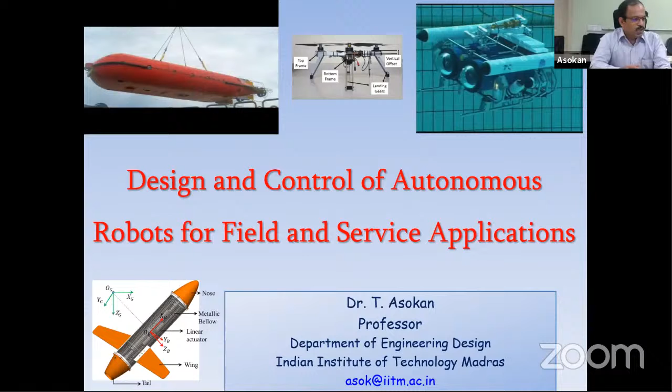Before getting into the topic, let me briefly tell you what I do as part of my teaching and research. As introduced, I am in the Department of Engineering Design, so my primary interest is in robotics. Of course, I work in other areas like medical devices and other design projects also, but primarily I look at the problem from three perspectives. One is the design of robotic systems - how can we design innovative robots or innovative robotic systems for field or service applications?

Once you design a robotic system with some novelty, we need to look at the dynamics of the system to ensure that the robot will perform the way you want. And to do that, we need to develop the mathematical models, simulate it, and then try to see how the open loop performance of the system is. Then we need to go for the design of controllers or the control system to ensure that the system behaves the way we want. So this is basically the three areas I focus on.

Most of the robotics projects which I do primarily focus on these three aspects. So any robotic application which has got these three components will be of interest to me.

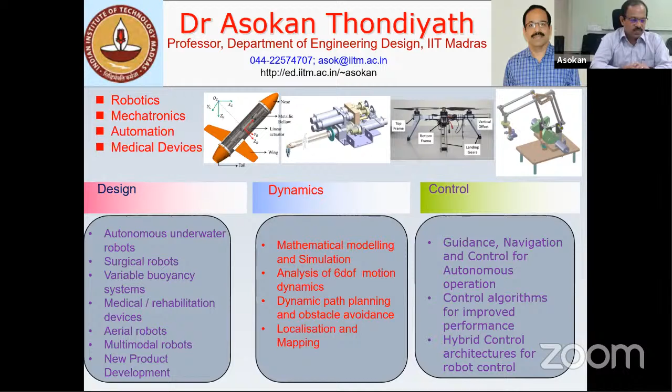I've been working on various projects for the last 20 years. I started my research with underwater robotics and now currently focusing on medical robotics, or how do we develop robotic systems for medical applications. But today's talk will be primarily on autonomous robots, or what are the difficulties in developing autonomous robots. We talk a lot about autonomy, and people are talking about autonomous robots, humanoids, and self-driverless cars for many years.

And we see that still we are far away from having a fully autonomous robot. A person who is not fully into robotics will think, what is the challenge, why are people not able to come up with autonomous robots? Because you see many things in movies, and many times we believe that these things are really possible, and we used to wonder why it is not coming into the market.

There are many challenges in developing autonomous robots. I'll just touch upon a few of such issues, and then briefly explain a project which we did on development of autonomous underwater robots. That's going to be the agenda. I have only some 35 minutes left, so I'll try to finish within the time.

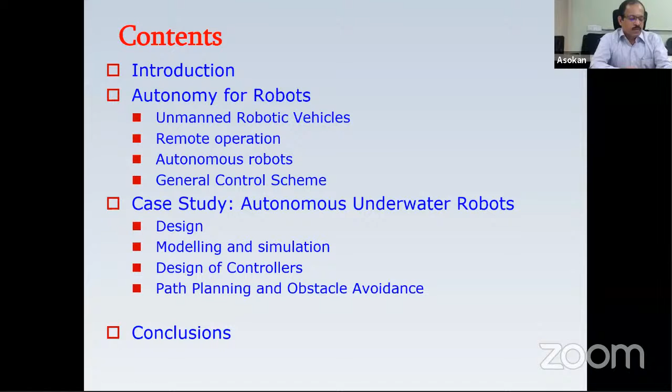I'll be talking, starting with autonomy for robots, basically talking about the different types of robots and where we actually use these kinds of robots.

If you look at the history of robots or the evolution of robots, you will see that we had industrial robots somewhere in the 1960s, and till 2000 we were having only industrial robots, and most of the other robots were still in the laboratories. It was only in the 2000s everyone realized that we have developed too much technology, or too many systems and technologies available, which need to come out of the industry and shop floor and move to the home or to the places where actually humans will be interacting with the robots, where the robots can be of much use to the human.

That is where we started getting underwater robots, medical robots, and personal robots - you name any field, and we can see that there are some applications of robotic technology in that field.

That is one of the important aspects of robotic research also, because the current research and development in robotics is primarily propelled by the application field. So if you have an application, if you can develop a robot for that application, that is basically the contribution that you can make. Parallelly, we'll be developing control systems, navigation systems, and other things.

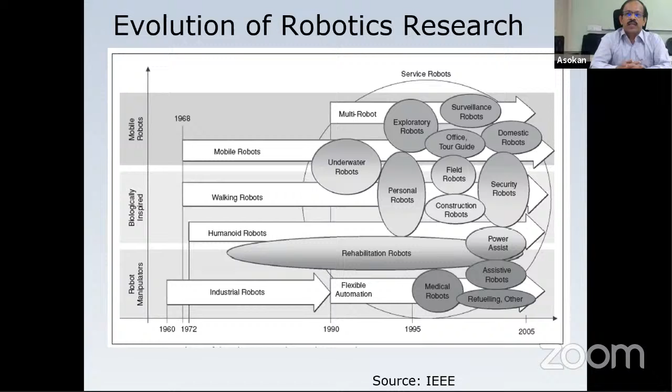But primarily, when it actually goes to the field or comes to an application, that is where we are making a real contribution. Now coming to these, these are actually some of the robots which we call field and service robots.

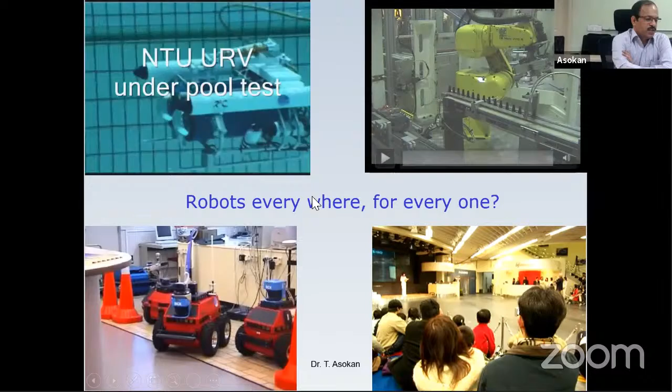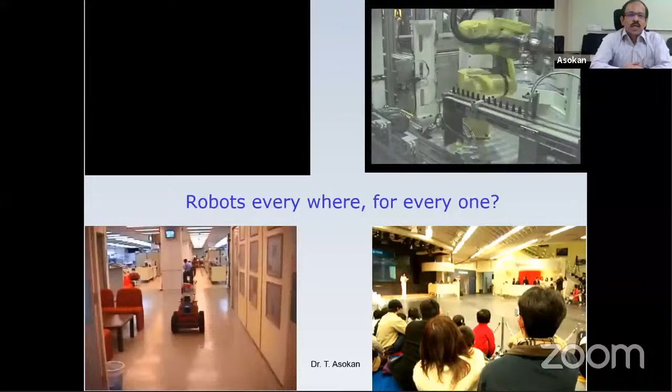So what you are seeing is an underwater robot on the top, and then you can see the mobile robots, and of course this is an industrial robot which is familiar to many of you, which has got a fixed base, and all other robots you are seeing have mobility.

So the requirement in an industrial robot is completely different from a field or service robot, because you add many things to the robot and it's more complex. And as you can see here in the last video, the bottom corner, the humanoid robot.

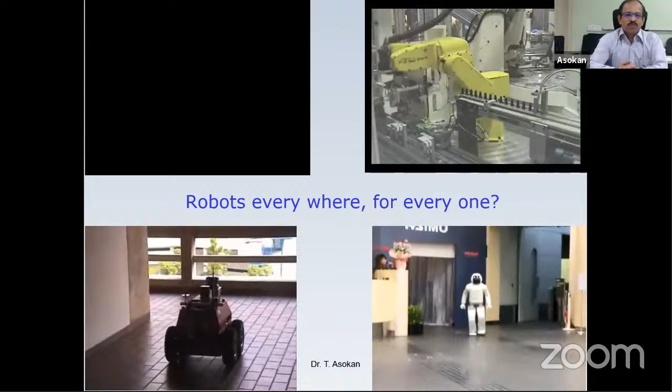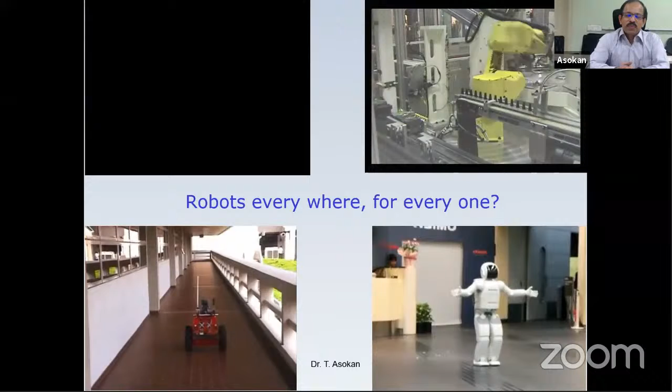If you look at that, it's maybe the most complex of all these robots, because of its two-leg locomotion, walking locomotion, and then the requirement of having different joints and different mechanisms.

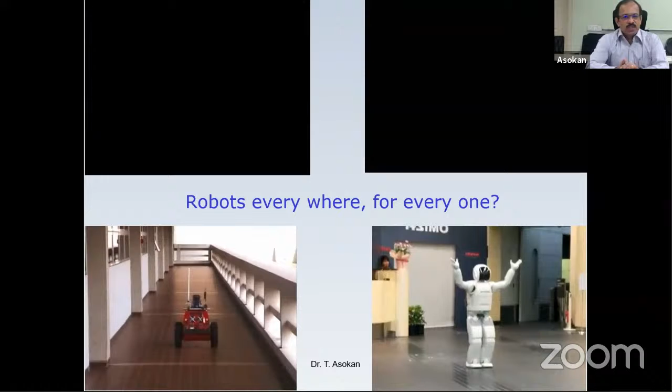So it's very possible to develop a humanoid robot, but the challenge is how can we make it close to the human and at the scale of human application. So whatever we have at present is more like laboratory purpose, with very limited application for practical use.

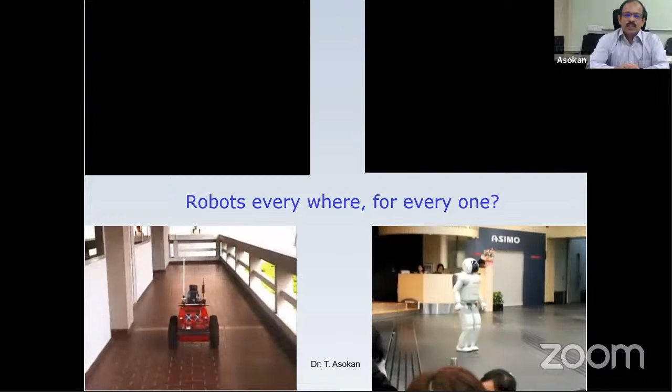Now, these are the different kinds of field robots available. The question is, when do we call this an autonomous robot, or how do we classify them into different categories? If you look at the level of autonomy provided in the robots, we can classify them into two major classes.

One is remote operation, the other is autonomous operation. In remote operation, as the name suggests, the robot is controlled by an operator from a remote location. Things are not that difficult in this case, because the control is still with the human, and all the decision making is carried out by the human, so it can do many complex tasks.

But if you look at the other end, an autonomous robot, there is no human control, and therefore the robot has to make all its decisions and execute them like a human can, or a person with a little bit of autonomy. All the tasks that person can do, the robot should also be able to do.

Unfortunately, we are still very low in this category of autonomous robots, and because of that, we cannot do any complex tasks with autonomous robots, or only very limited tasks can be carried out. So the challenge now is to see how we can bring up this autonomous robot to the level of task complexity of a remote operation. Then we can say we have achieved some kind of autonomous operation for the robot.

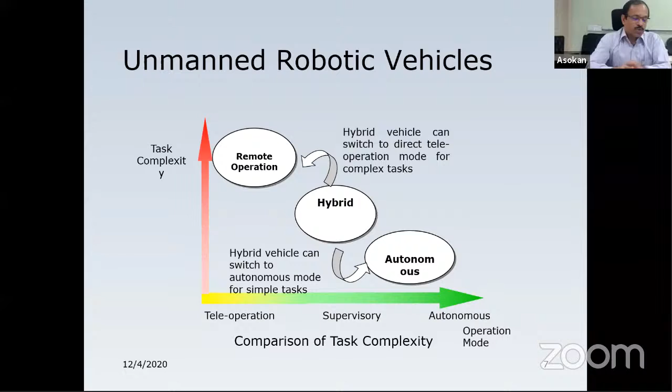Okay, so before going to autonomy, let's talk about one or two slides on remote operation. The remote operation is normally called tele-operation, where we have two parts for this tele-robotics: one is known as tele-operation, the other is tele-presence. So for any tele-robotic application, we need two aspects.

One, you should be able to operate the robot from a remote location—that means you need to send control signals to the robot from wherever you are sitting. The other part is that you need to get feedback from the robot, and create an environment where you feel you are actually at the place where the robot is. That is basically known as telepresence.

Telepresence is achieved through various kinds of feedback. You can get visual feedback through camera systems, touch feedback through haptic systems, or sound feedback. If you can create the same environment as where the robot is, we call it a telepresence system.

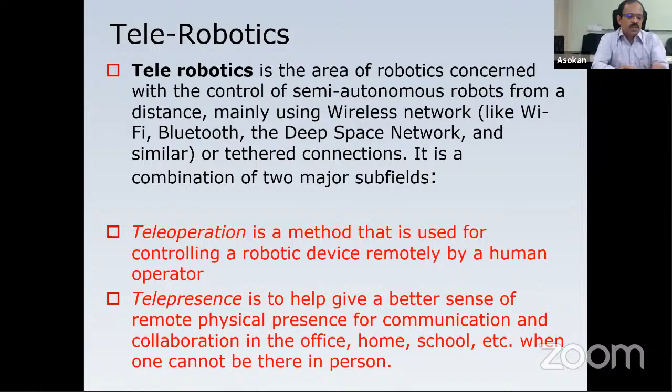This has come to a good level of development and implementation. One of the most important developments in this area is surgical robots. Most of you must have heard about surgical robotic systems—there are robots which can actually do surgery, and they follow tele-robotic principles.

So you will have a master robot. Let me open this—sorry. Yeah, so you can see that the doctor will be comfortably sitting at a remote location, called the surgeon console, operating the master robot. The master robot is controlled by the surgeon, and at a remote location you'll have slave manipulators, which carry the surgical tools.

Depending on the commands the doctor gives, the slave robot is able to do the surgery. Then, of course, you get telepresence to some extent through visual feedback as well as force feedback and touch feedback from the surgical site through the slave robots.

So this is a typical application of tele-robotics, or remote operation of a robot by an operator sitting at a faraway place. There are challenges in developing it, but most of the technologies are available, and that's why we have good surgical robots in the market. Many hospitals have surgical robots—even in India, we have more than 10 such robots in different hospitals.

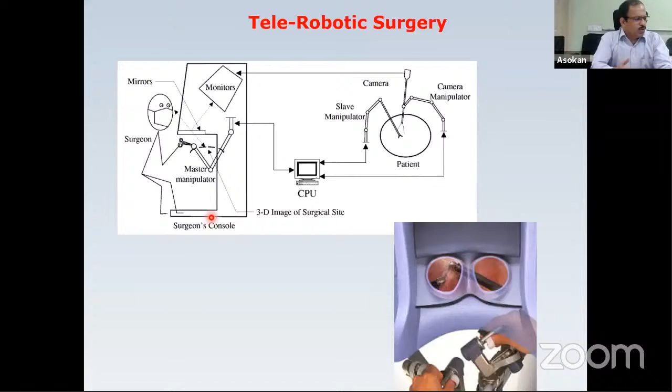So we have actually worked on such a robot design. I don't have time to go through the details, but I'll just show you a video of this robot that we developed as a surgical robot.

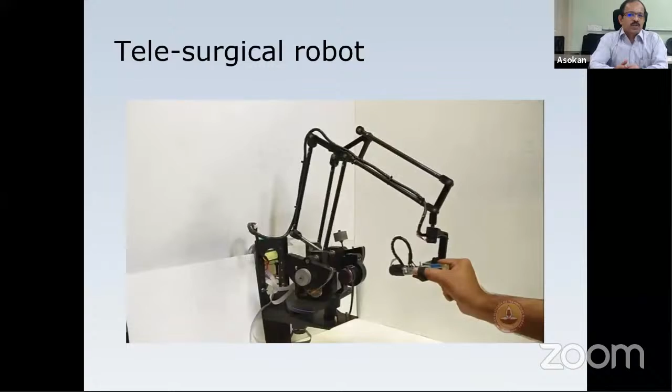So this has got a master and slave manipulator. This is the master robot, which is actually a 6 degree of freedom manipulator with an additional degree on the grasper. There will be two such master robots, operated by the surgeon, and these will be connected to the slave robots.

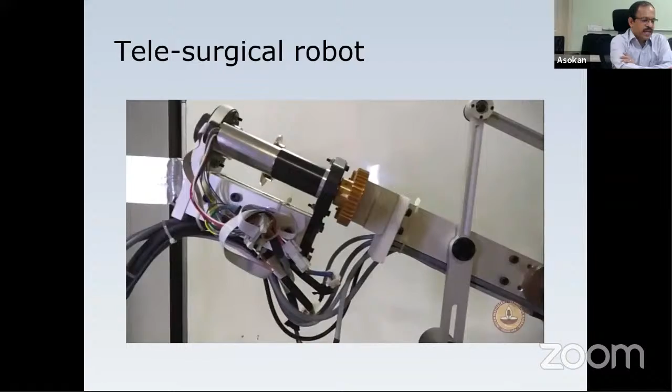This actually shows the slave system. The slave system also has the same number of degrees of freedom, and this is the tool which will go into the surgical site where the surgery will be carried out. Then you will be able to map this to the master operation.

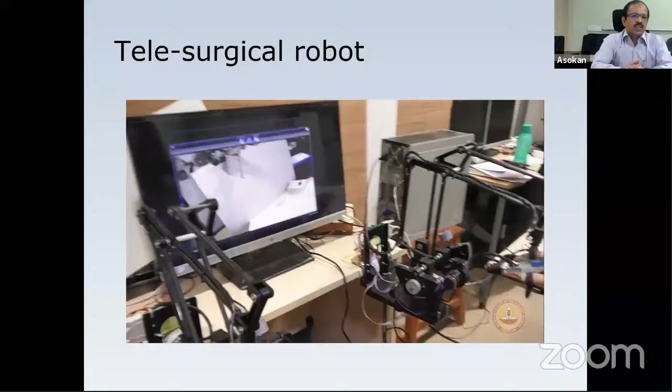You can see this person is actually controlling the master robots, and by controlling the master robot he is able to manipulate the slave robot at the remote site. He'll get feedback from the visual feedback, and tactile or touch feedback can be obtained through the sensors.

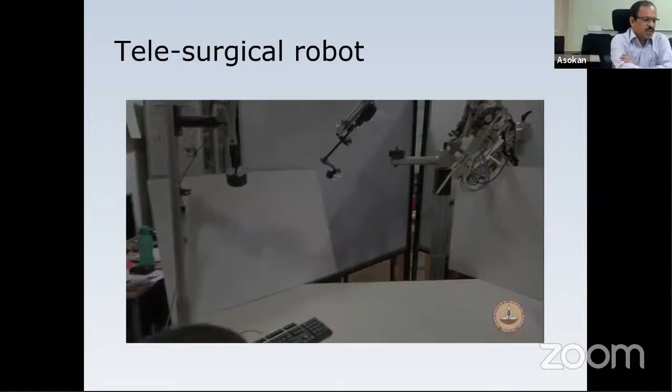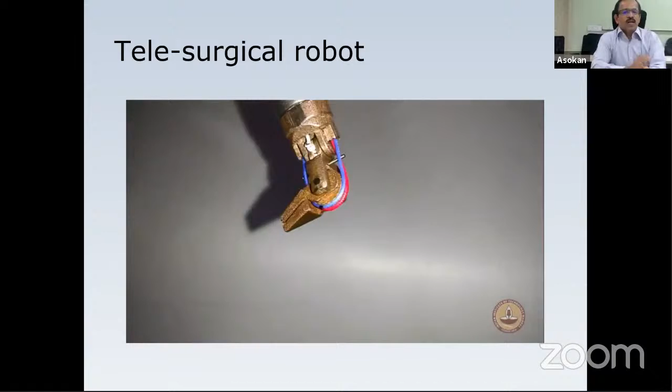So that is basically the tele-surgical robotic system. Just wanted to tell you that was the initial stage, that is how robots moved completely from the industrial field to the surgical field.

And now, we know that it's still controlled by the doctor, so the robot as such has no intelligence in this case. The robot is still following the instruction from the master robots.

Now, as we move to the next thing, that is autonomous robots. The logical development is now, how can we make this robot intelligent so that you don't need an operator sitting at a remote location controlling the robots. That is basically autonomous robots.

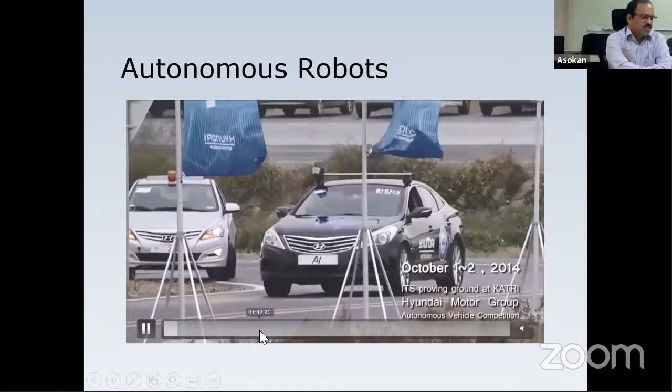Most of you have heard about autonomous cars. That is one of the latest crazes in the robotics field. How can you make cars or other automobiles fully driverless, where we can build intelligence into the system and do it. You might have heard about the Google car and other autonomous cars developed by various agencies and research centers. This actually shows one of the videos testing an autonomous car.

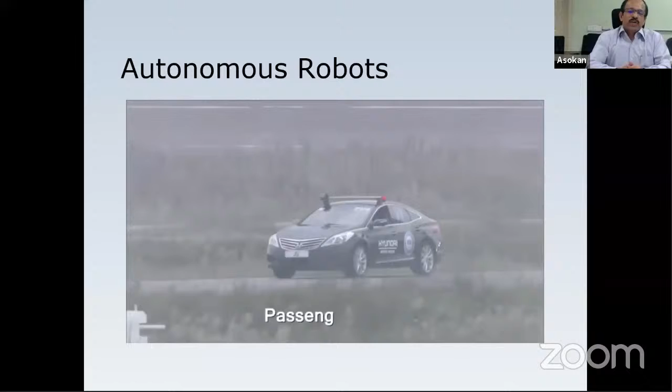As you can see here, the car will not be having a driver. The car has been programmed to go through different paths and identify its own track, then avoid obstacles, identify traffic signals, identify pedestrians, and follow the traffic instructions.

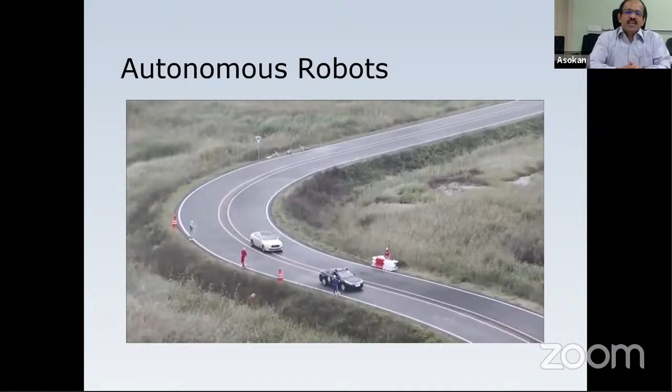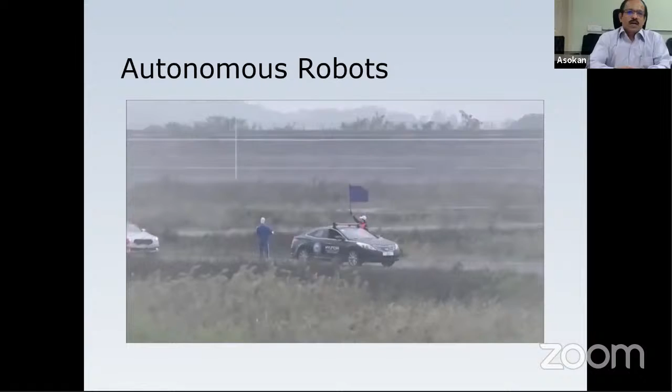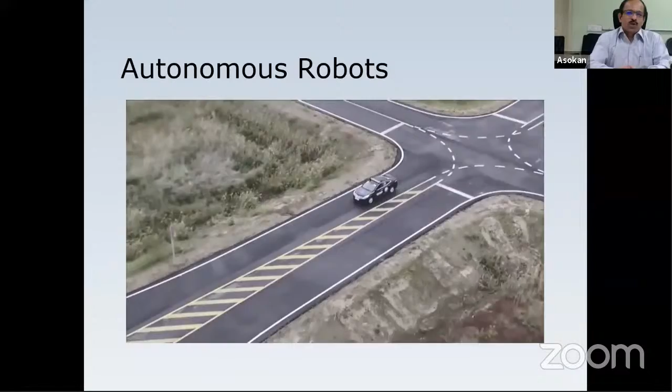So all these things are being programmed to the robot, and the robot has to follow the instructions and take decisions based on the sensor input, the sensor data, continue the task and finish it and go and park, or whatever instructions are given to the car. All this needs to happen without any intervention from the operator or any external command signal going into the robot controller. So how can we do this, or what are the basic requirements to achieve this task?

This is what we as robotic scientists are interested in. Now, let us see what are the basic requirements for any autonomous robots. If you look at autonomous robots, or any robot system which needs to behave with its own autonomy, there are a few fundamental requirements to be satisfied.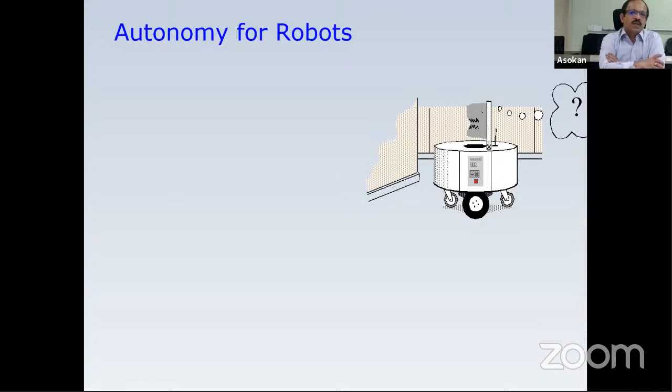For any such autonomous robot, whether it is an autonomous car or any other robot, whether it is an underwater robot or an aerial robot, the robot should be capable of doing a few things without any intervention. First, the robot has to answer three questions. The first question is, where am I?

What is the position of the robot in its environment, wherever it is? It can be a ground, a room, or some other place. The robot should be able to know where it is, or what is its current position. It's like a human also.

When we are in a very unknown place and we have been asked to do something, the first thing we need to try to identify is, where am I now? Once you know where you are, and you know where you are going, then you need to plan how you can reach there. If the robot can actually answer these questions and execute its answers, then it becomes an autonomous robot.

To do this, we need to have a few things embedded into the robots. The robot needs to have a model of its environment. It should know how to decide where it is, and what are the possible locations or which place it is. So there should be a kind of map given to the robot, or a digital map should be provided. If it is not there, the robot should be able to make a map of its own. This is the first requirement in order to answer the question, where am I?

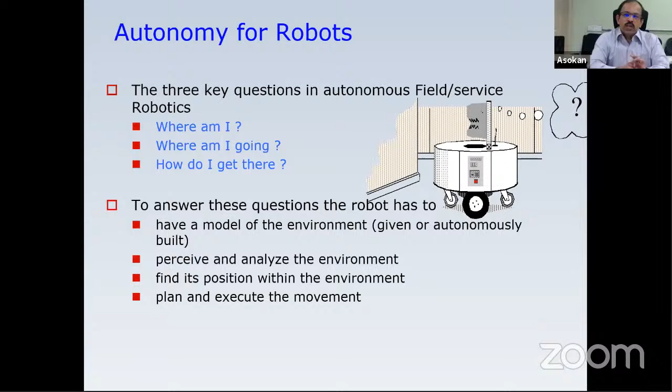Once it has a map, the robot should be able to perceive its environment, look around, and see what things it can see. Based on that information, it should be able to analyze the environment and find its position within it. So the robot has to have a map, enough sensors to identify and analyze the surroundings, and then identify its location within that environment. That will answer the question, where am I?

Then the next question is, where am I going? How do I get there? So it has to plan. Once it knows its location and where it has to go, it has to do planning—we call it path planning or trajectory planning. Once it is planned, it has to execute that motion, starting to move from one point to the next, and through all the via points, reach its location.

As it goes through this, it has to identify obstacles, avoid them, and ensure that the robot is safe, among many other things. Once we make the robot capable of doing all these tasks, we can call it an autonomous robot, which can be deployed for any field or service application. We call this the locomotion and navigation of a robot. We need to deal with this in order to execute its motion to the target.

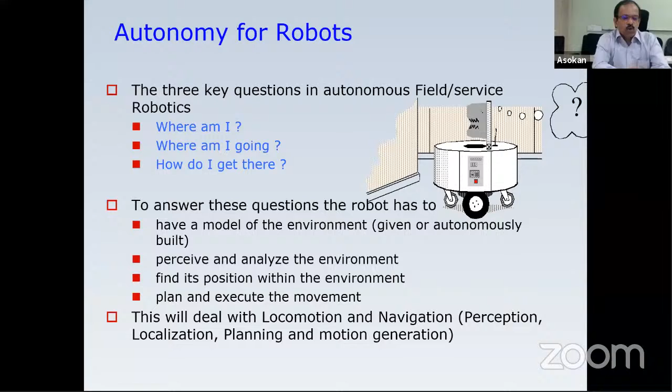The four important elements involved in all these activities are perception, localization, planning, and motion generation. Perception is how you perceive the environment. Localization is how you identify the current location. Planning is how we actually execute the task assigned to it, and finally, executing the task is the motion generation. If the robot is capable of doing all this autonomously, then it has full autonomy to carry out the task.

So you may wonder, what is the challenge? We have sensors to do the perception, a lot of algorithms for localization, a lot of algorithms for cognition, and we have motors, actuators, and control algorithms to do this. So why are we not able to do this and make fully autonomous robots? Yes, we have a lot of technologies available.

We have a lot of sensors and other algorithms available, but everything comes with its own limitations. So there is nothing which actually comes without a challenge. And when you try to overcome all these challenges, then you find that it is not that easy to develop fully autonomous robots.

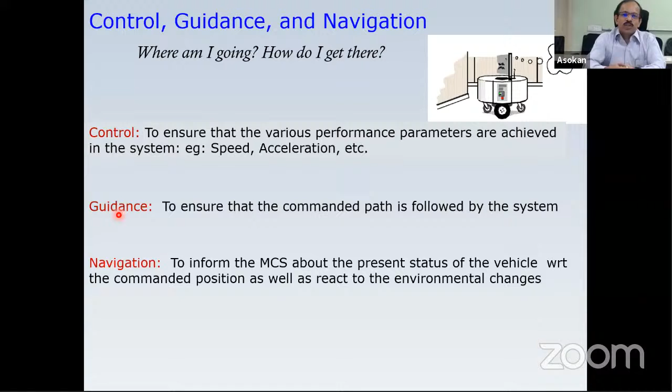Most of the time we do many things without even knowing that we are doing a computation inside our brain. But that actually comes from our experience, our own experiences and understanding. The robots don't have that kind of experience, so everything has to be computed and it has to be executed.

As I told you, the first part is perception. The sensors and the sensors' uncertainty are the main challenges in the perception part. Every step has got its own challenges. Sensors are the first part which actually give the perception of the environment. There are multiple sensors available for autonomous robots: position sensors, velocity sensors, and obstacle sensors. We should be able to use all these sensors to get a good perception of the environment.

But what actually happens is that all these sensors come with their own uncertainty. No sensor is 100% correct. If you use a sensor to measure the distance from one point to another, whether a laser sensor or a sound-based sonar sensor, if you make 5 measurements, you will get 5 readings. They may be very close to each other, but they will still be 5 different readings. So you cannot really use all 5 readings directly. We know there will always be an error when you do measurements. And when you do this measurement at different times, temperatures, or humidity, again you will see variations in the readings.

So the question is: how can we actually have a good estimate of the reading without any uncertainty? And that is not possible. So we need to always consider the uncertainty in the sensors.

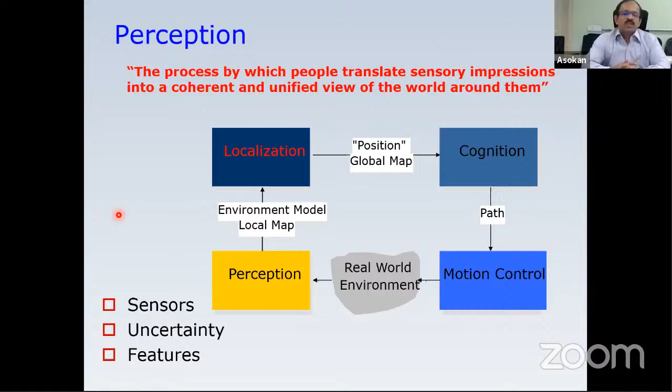Then the features available in the environment also present many challenges, because a door and a cupboard will look similar in a camera image. So how will the robot distinguish between these two? A cutout of a human and a real human may appear almost the same in the image for a robot. So how can the robot actually decide whether it is a real human or just a 2D cutout? These are the challenges in terms of sensors.

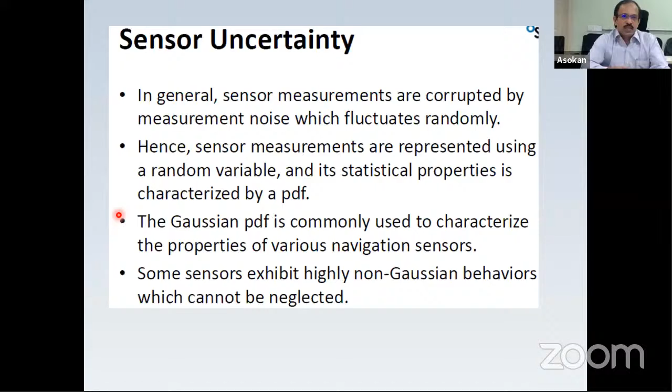This sensor uncertainty is, of course, being addressed through various means. One approach is to look at this as a probabilistic model. Probabilistic robotics has got a lot of algorithms and methodologies to model this uncertainty and then see how it can be used to predict the position of the robot, or how the robot's position can be predicted even under uncertainty. So that is one challenge being addressed, again as part of probabilistic robotics.

There is something called an error propagation law. That is, if you use the distance from one point to another to locate the position of the robot, then if there is an error in the distance, your position also has an error.

So how much is the error that is propagated to the robot position is basically addressed through something called an error propagation law. This error propagation law plays a major role in estimating the position of the robots. If the sensor has got an error, that will propagate to the position of the robot, and then whatever the robot does based on this position will also have an error.

So after some time, if the robot starts moving based on this information, you will see that the estimate of the position is completely wrong, or there is a large uncertainty in the position of the robot itself, and that is where the robot loses its control, and then you will not be able to get any autonomous operation from the robot.

So this is one challenge we still have, and though there are many algorithms, we still have a lot of uncertainties in this. To some extent, these are solved for outdoor robots through GPS and other methods, but for indoor robots, positioning is still a major challenge because of the sensor uncertainty.

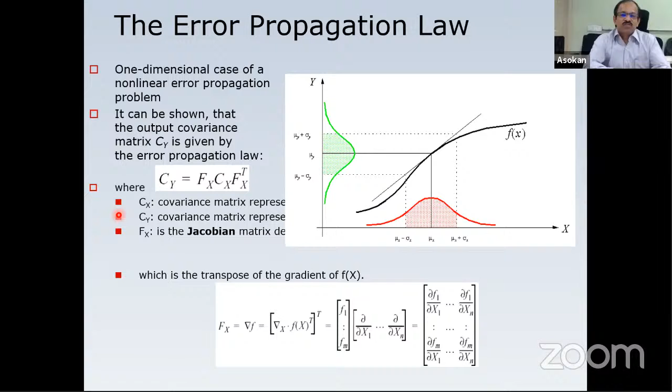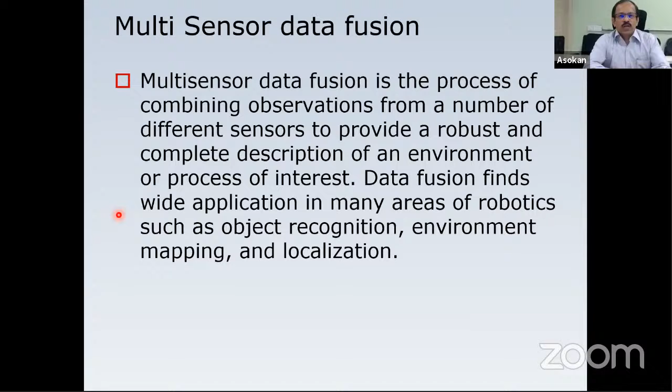People use multi-sensor data fusion to overcome this challenge. You can use different sensors and then fuse the data to try to reduce the error. So what will happen is you can reduce the error, but then your computation increases, and the robot becomes much slower compared to what you are expecting it to have.

Okay, so if you are just looking at the localization part, you can see how the robots actually do this. It will use its encoders on the wheels to see how much it has traveled from a known position, and then calculate where it has reached based on the odometry from the sensors attached to the wheels. So if it's running at a particular RPM for a period of time, it is possible to predict how much the robot has traveled and where its position is.

But then, as I told you, the encoder will have errors, so you need to correct it. So what we do is use something called a camera-based imaging system or some other kind of matching, and observe using sensors and correct the error using this sensor. This is basically the probability-based localization method, where you use multiple sensors and matching algorithms to predict the position of the robots. That is just one of the methods for localization, and there are many other methods to do the localization of the robots.

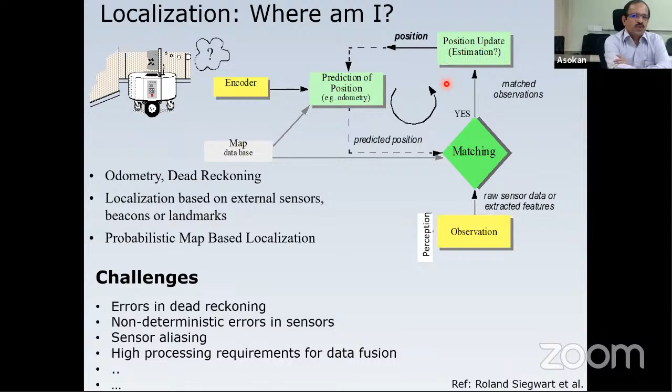Okay, so to explain this probabilistic map-based localization in a better way, I'll use this picture. Assume it's a 1D environment. The robot is moving in a straight line, and it is starting from a completely unknown position. The robot does not know where it is currently, so it assumes that it could be anywhere in the environment.

So it says that it has a 100-meter travel, and it does not know whether it is at 20 meters or 30 meters or 50 meters. So it assumes that it could be anywhere in this environment, giving equal probability for all the locations. The shaded line shows that equal probability for the robot to be anywhere in this location. That is where the robot will start.

And the robot has been given a map saying that there are 3 poles or 3 posts on the path, and the location of these posts are already given to the robot, saying that the distance between these posts is so and so. That is the information the robot has.

Now the robot starts moving, and it sees the first post over here, and then the robot knows that it could be either at this location or this location. Because the robot knows the map, it actually says that it could be anywhere in the location.

Now the robot starts moving again, and there is nothing to see, or the robot is not able to see anything, so its uncertainty again increases. As you can see, the uncertainty changes over here. So the probability was very high here, but it has gone down again.

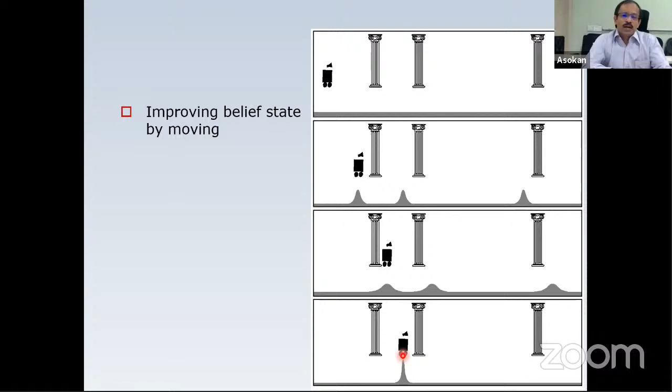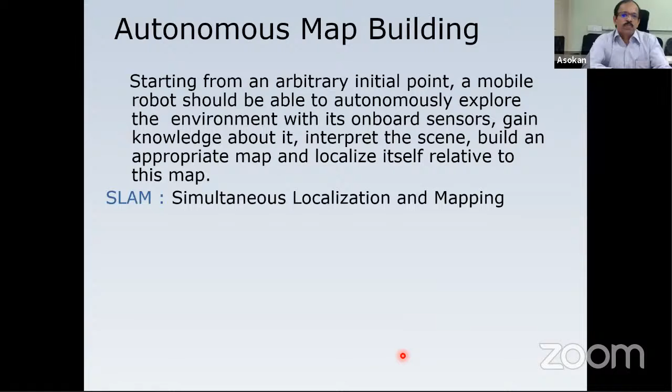Let me skip this - this can actually be done through autonomous map building. I'll just skip this part, because if the map is not there, the robot will be able to create its own map and do the mapping. So let me skip this and go to the main building blocks if you want to really develop a fully autonomous robot.

As I mentioned, you have this navigation system, then dynamics and controls, guidance and control system. You need to develop these two, the navigation system and the vehicle guidance and control system, in order to develop a fully autonomous robot. What I mentioned was only one of the challenges. There are many - at every stage you will have this kind of challenges. Localization I just mentioned, but in guidance and control also you will see there are many other challenges.

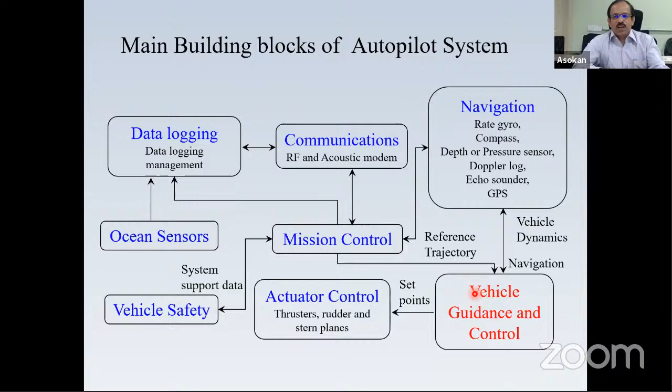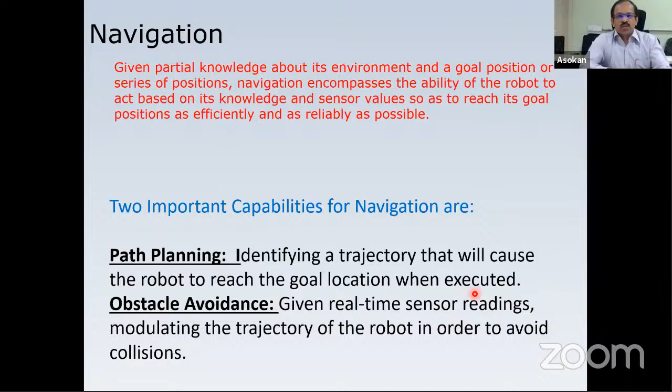So there are many path planning algorithms. In order to do guidance and navigation, you need path planning algorithms, and you need obstacle avoidance algorithms. There are multiple path planning and obstacle avoidance algorithms existing in the current literature, but each one comes with its own difficulties. None of them will be universally acceptable. Some will be good for some environments, some will be good for other environments. So we need a good path planning and obstacle avoidance algorithm in order to give full autonomy for the robots.

So let me skip this and go to the implementation part. I only have another 5-6 minutes, so let me explain how we actually implement full autonomy for a field robot. I'll take the example of an underwater robot.

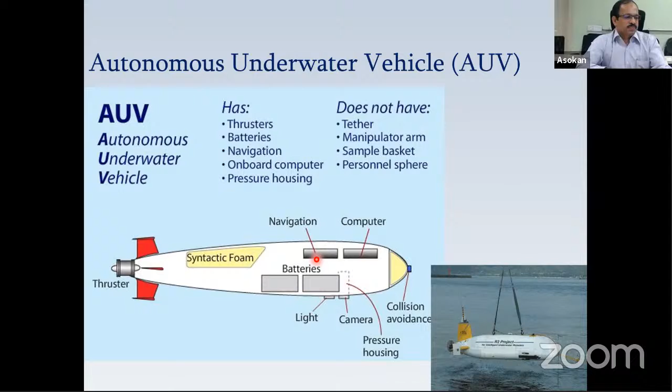In general, the design of such robots will have a hull in order to overcome the water pressure, and all the electronics and other things will be inside the hull, with the thrusters and control planes to generate control forces. As you can see, there will be many things inside - the navigation system, power supply, payload, and control guidance system - everything will be inside so that there is no contact with water for these items. This has to withstand the water pressure, otherwise it will break and the robot will be lost.

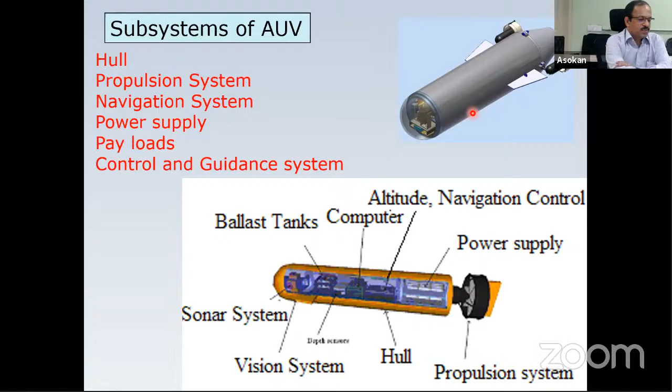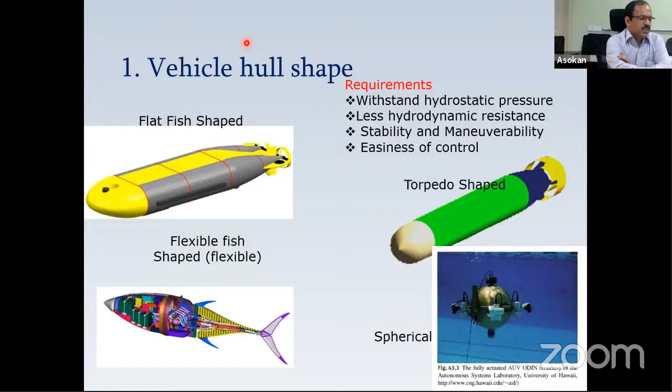You can have different shapes for the robot. It can be a flat fish shape or a torpedo shape. So depending on the requirement, you can choose this kind of shape or that shape.

As I mentioned, the hull needs to be waterproof. It has to withstand the hydrostatic pressure, and the drag forces should be minimum, because as it moves in the water, there will be a lot of forces acting on it. We have to reduce the drag forces, and then controllability and maneuverability is an issue - depending on that, you need to modify the shape so that it will be easy to control and maneuver.

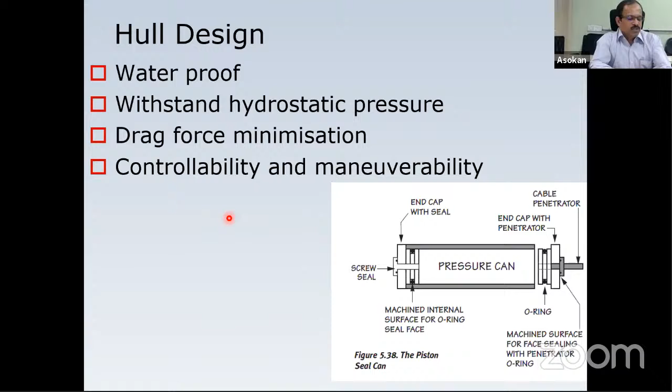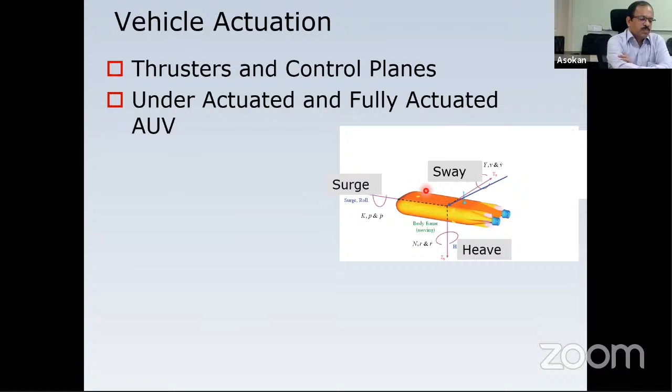And then there will be thrusters and control planes attached to the robot. You can see this is a flat fish shape. It will have horizontal thrusters and vertical thrusters, so that it can go up and down and move forward also.

These are some of the design features. I just wanted to tell you that many of these systems are available off the shelf, so you can actually buy them and develop autonomous robots. A physical robot can be developed without much difficulty.

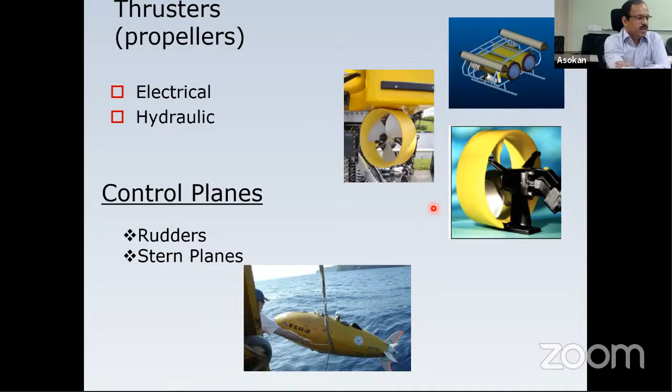And then there are multiple sensors available. You need to have navigation sensors, health monitoring sensors, control sensors, and of course the payload sensors also.

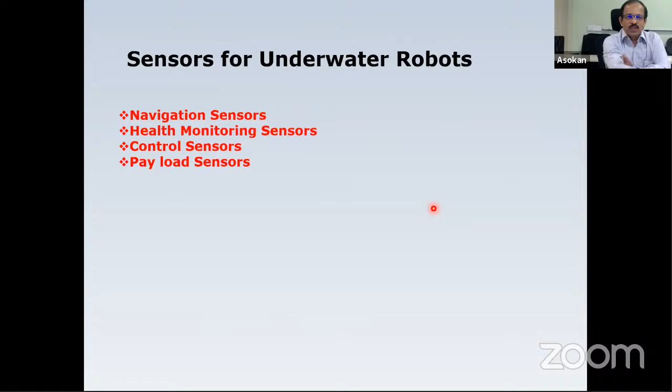Once you have this design completed, then you need to look at the dynamics of the robots. You want to find out whether the robot will really move forward if you actuate the thrusters, and if you actuate the thrusters, in what way it will move. So in order to study this, you need to develop mathematical models.

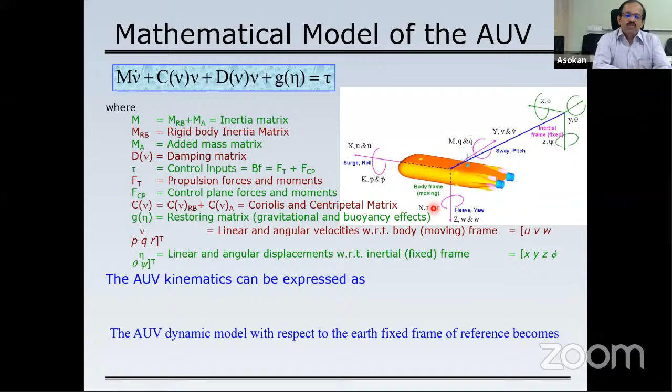There are standard methods for developing such mathematical models. Once you have the model, and if you know the parameters like its inertia and other parameters, you will be able to simulate the behavior and find out what way the robot will behave once we actuate the thrusters or the control planes. That is one basic requirement in order to develop autonomous robots. For any robot, you need to analyze its dynamics and then study the behavior.

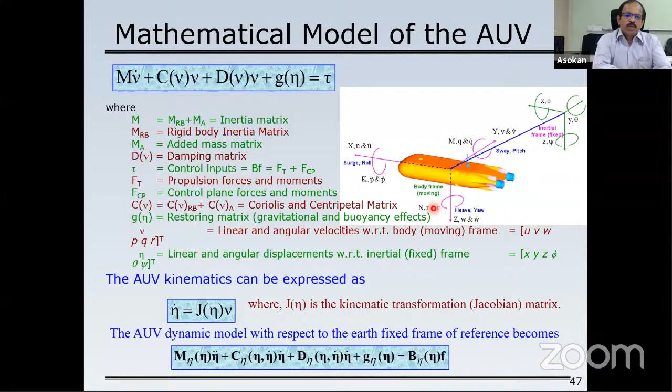And then you need to implement the guidance and navigation system to the robot. So that was more of a physical robot. Now you need to bring the brain of the robot into it, and that actually is the guidance, navigation, and control system. The guidance system will take care of obstacle avoidance and path planning.

The navigation system will ensure that the robot is moving along the required path. This control system will take all this information and then decide which of the thrusters need to be activated, or which control plane to be activated, so that the robot moves along the desired path. That is basically the implementation part, from where you can implement the navigation and guidance system onto the robots.

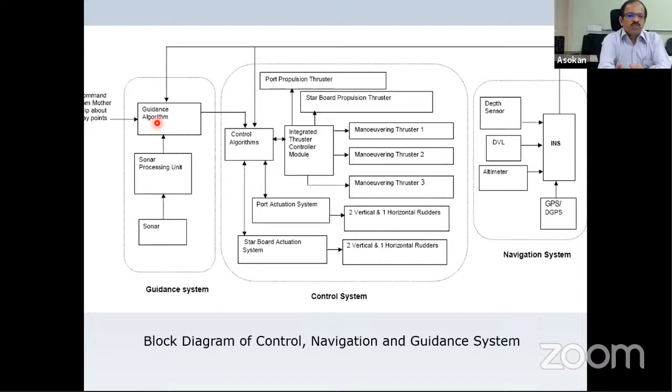In the control algorithm and the guidance algorithm, you have many things required. One is basically the path planning algorithms. How do we actually have a path from point A to B? What kind of a path can be designed? And then how do we actually avoid the obstacles as it is moving? If there is an obstacle, how can it be avoided?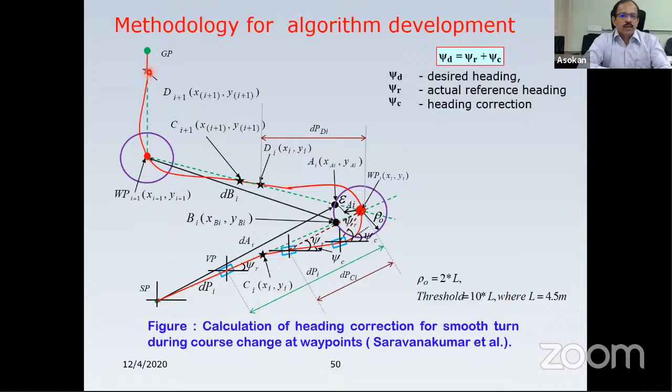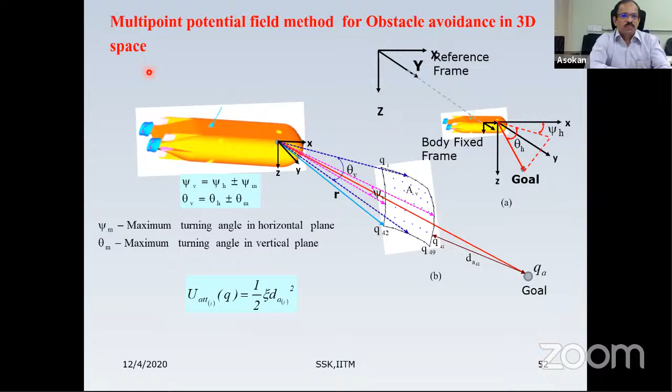And then you need to have obstacle avoidance methods. There are multiple methods like the potential field method and others. We need algorithms like these in order to have obstacle avoidance. Again, these are some of the research we did. We developed a new method called the multi-point potential field method for obstacle avoidance of underwater robots.

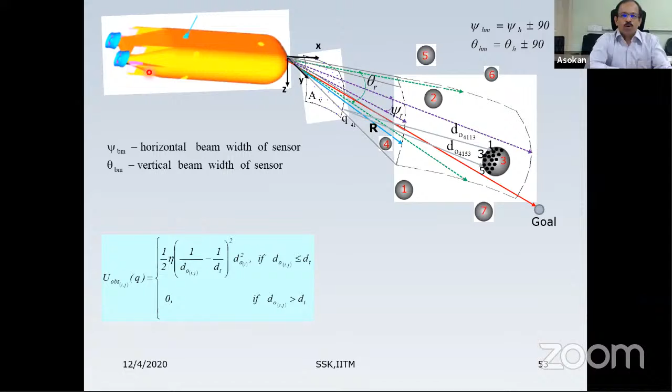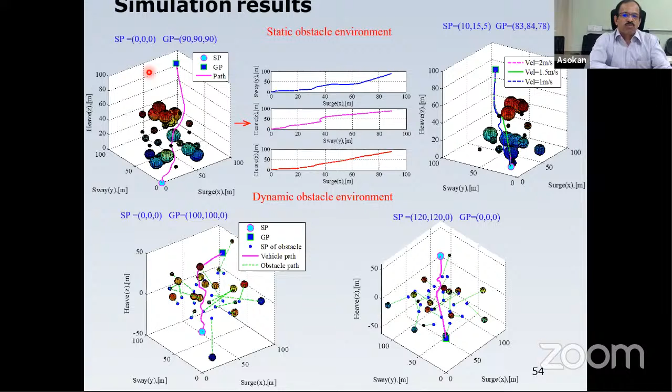And then with all this, we do simulation studies to see how the robot will behave under various situations, path planning and obstacle avoidance. And once you are comfortable with all these, then...

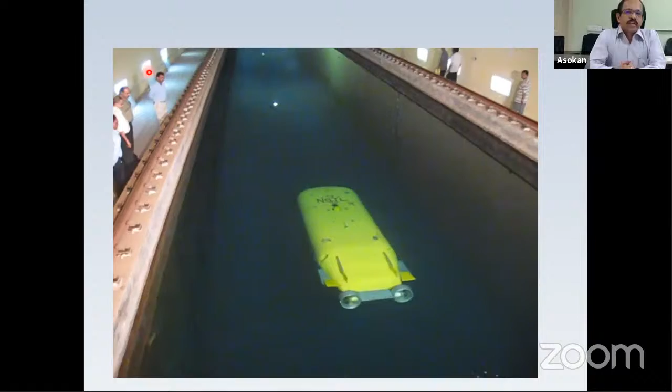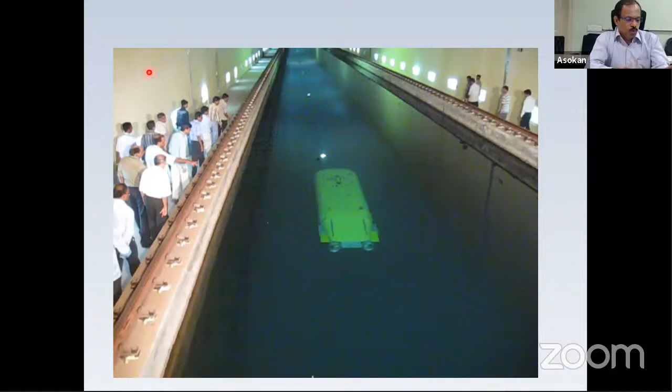...in the sea for the next trial. So this is actually an implementation.